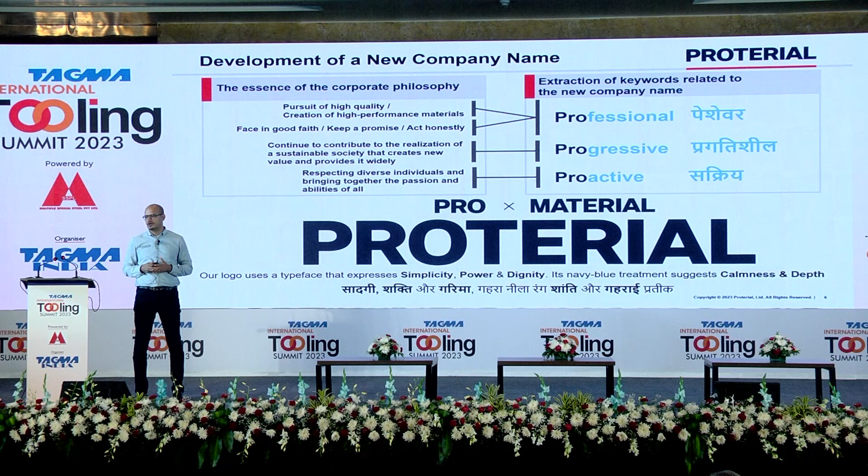You must be wondering what is the philosophy behind it. It's a combination of 'pro' and 'material'. Pro in the sense we would like to convey ourselves as being professional, progressive and proactive, and of course we remain a material-centric organization - so Proterial. So Peshevar, Pragatisheel, or Sakriye - these are the foundations of the name or the logo in that sense.

But no matter what the change of name or top management, we still remain a Japanese organization. The production facilities remain as they've always been, in a place called Yasugi in the southeast part of Japan. It's a single manufacturing facility for Proterial products, and that hasn't changed in the last 150 years, I would say. The facility remains in Yasugi, where various specialty steels as well as die steel material are still manufactured.

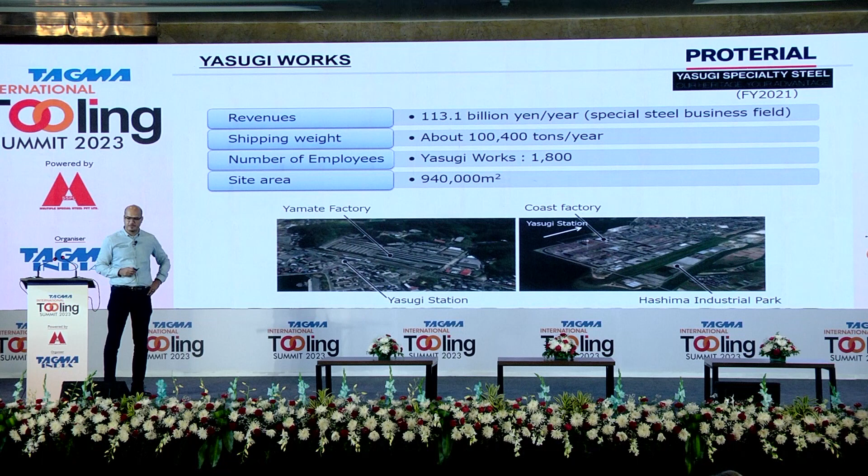Our heritage is basically related to the Tatara steel manufacturing process. This is something very unique to Japan. The Proterial Yasugi facility is one of the UNESCO sites where this traditional process of producing steel is still being followed, used primarily to make traditional samurai swords. That's where the origin is, that's where the organization started, and now it has moved over to various other segments as well, including die steel.

But the foundations are very traditional - we still produce such swords, the raw material for these swords. It's the only certified facility in Japan which can produce this raw material.

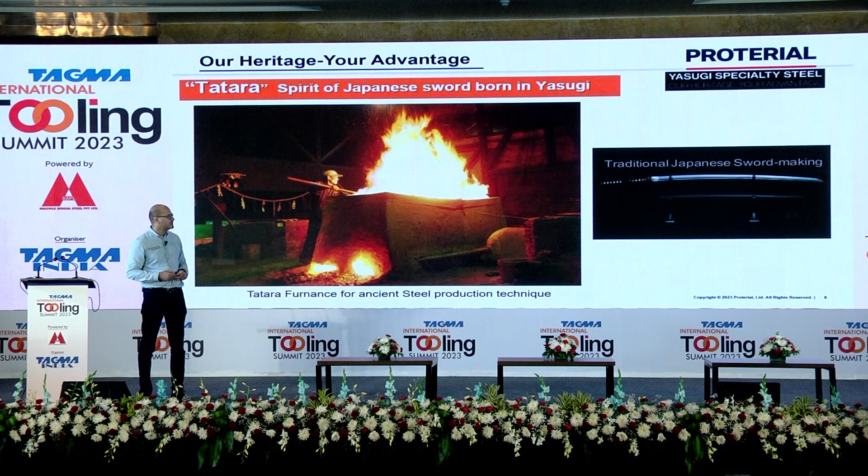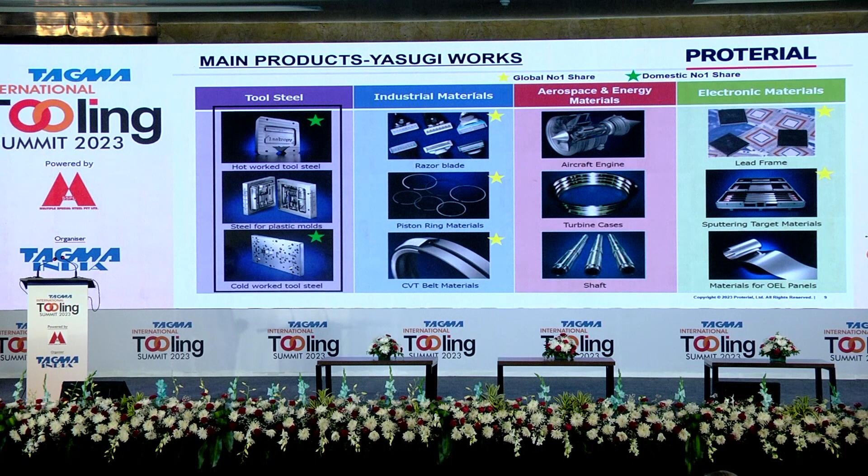As I said, the organization has diversified into various segments - die steel is just one of them. As you will realize, we put some yellow stars and some green stars in our product portfolio. Yellow stars are the product areas where we are globally number 1.

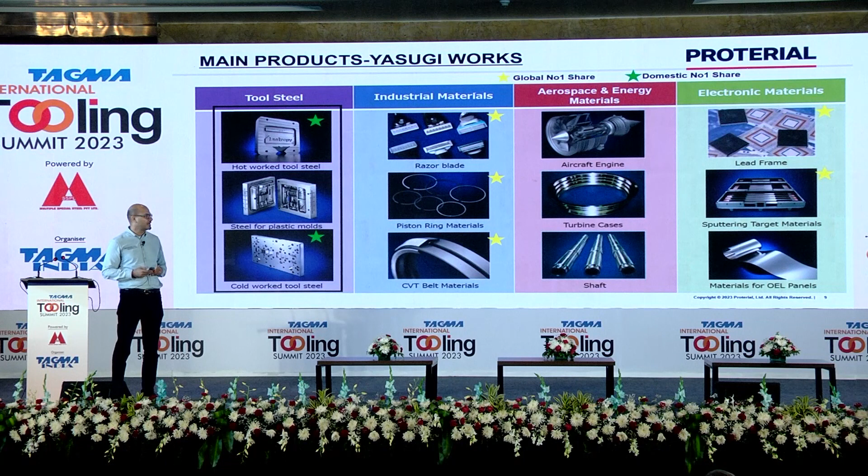Proterial, or Hitachi Metals as it was known formerly, is into various segments. Tool steel is one of them, but we are also in other segments as well: razor blade, piston ring material, CVT belts, sputtering targets for electronic material. But we take pride in the fact that we are number 1 in the Japanese market for die steel products - both for hot work and cold work steel. Proterial, or Hitachi Metals - I still can't take that word out of my vocabulary - remains number 1 in the Japanese market for die steel solutions. And that in itself is a big sense of achievement for us. We are not globally the number 1 supplier, but in the Japanese market we still hold the number 1 ranking.

In India, Proterial India, which I'm representing today, is based in Gurgaon, in Manesar. We have the complete portfolio of products for specialty steels, including die steel solutions as well. The operations are in Gurgaon, and we have a manufacturing facility as well for casting products.

The die steel retail operations, or the warehouse, just started in 2017, and that's where this whole journey of retail sales and coming into direct contact with our users in India began. We have the warehouse facility in Manesar where we cater to all customers directly. Having said that, we also have a channel partner in India - Goel Steel remains our channel partner. So in India, it's a combined approach where we try to cover the entire market both through direct operations as well as through our channel partner.

They also have the heat treatment facility today in Chennai, but we are investigating the possibility of investing in our own heat treatment facility in Manesar as well. So we want to be seen as a solution-driven organization rather than just product suppliers.

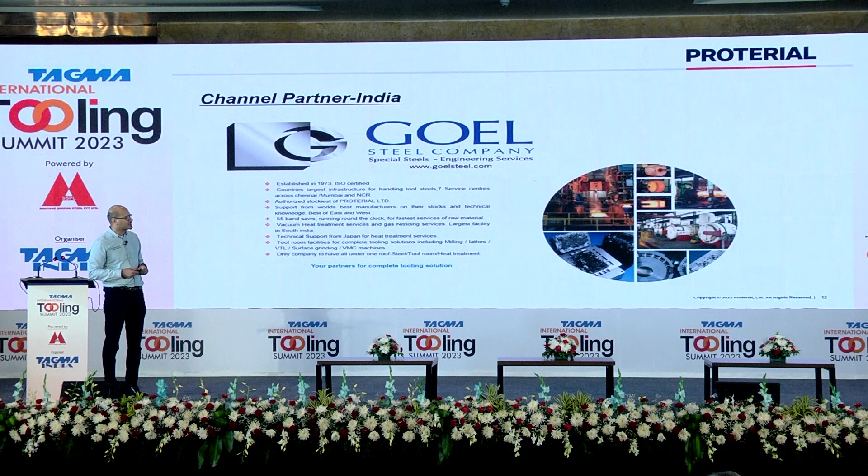Isotropy is something very unique to Proterial. Isotropy means that when we produce steel, we ensure the physical properties of steel are uniform in both the longitudinal and the transverse direction.

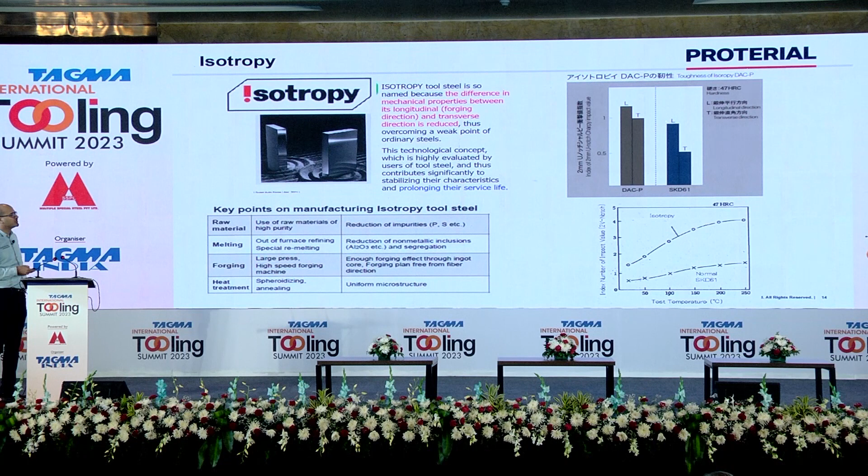A very simple example, this is SKD61. Always the toughness in the longitudinal direction would be much better than in the transverse direction. This is one gap we try to cover with our grades, where we not only improve upon the toughness, but also reduce the quantum difference between the physical properties in both directions. With that, you can be assured that irrespective of the orientation of your die or how you are using the raw material, you still get the same consistency of physical properties for your operations.

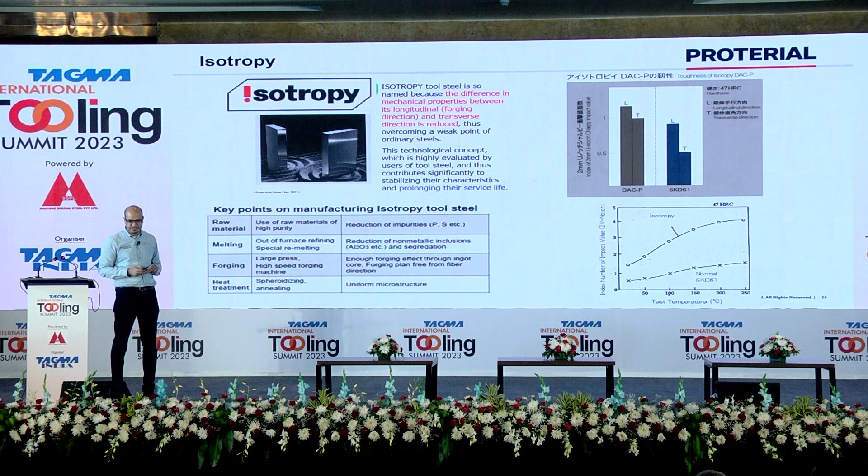I would not go into the manufacturing process, this is something which is clear to everyone, but we must highlight that our processes are very consistent. What we really believe in is the vacuum arc remelting and the ESR process, so that impurities are removed from the steels and you get the best quality steel available in the market today.

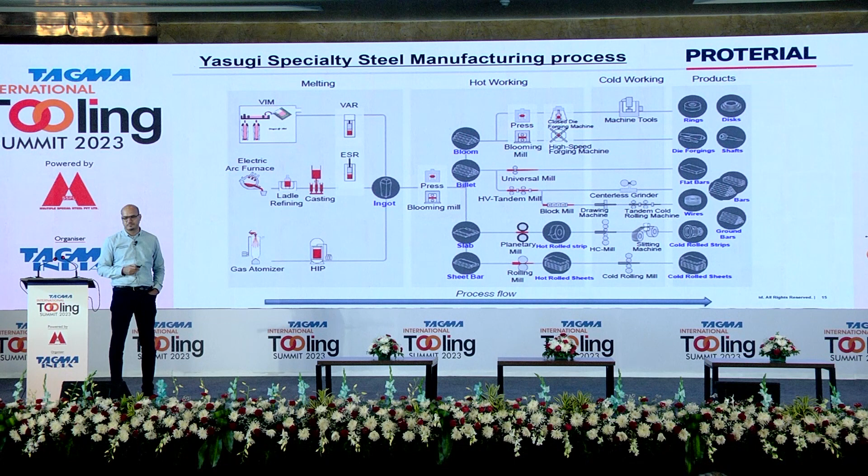I'll spend the next few minutes on the main topic, and that is some very revolutionary products that have come for the industry in both the die casting as well as the cold work operations.

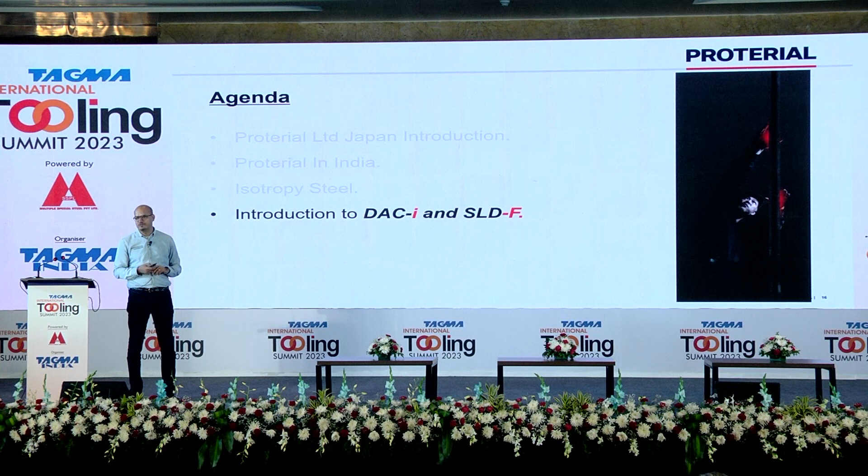Proterial, or Hitachi, does not introduce new products that frequently, but incidentally, in the last 2 years, the R&D department has been working for a number of years, and now it has come up with these two solutions which we feel have the capability to revolutionize the segment.

This has been made possible basically because we've invested in some very high-end equipment in our plant. This is one of the only facilities that exists in the Asian region, at least. A 100 meganewtons machine, a forging press designed to deliver a forging force of 90 meganewtons, and forging force and upsetting force of 108.

With this, even the possibility to do the ESR sometimes gets eliminated because the steel you get is very compacted. The kind of grain structures you get is extremely nice in that sense. With that facility, we are able to produce some of the new grades which I'll talk about today.

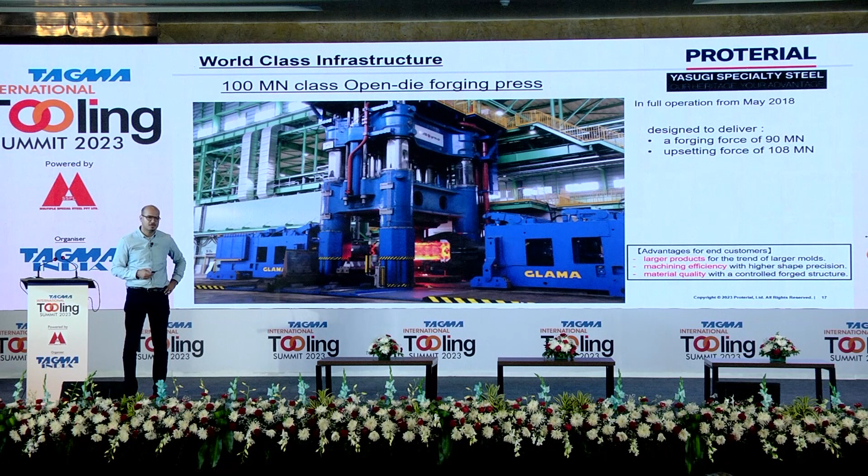The first one is the DAC-I grade. Indian market is already familiar with two of our major grades, that is the DAC-P and the DAC Magic series. DAC-P is the SKD61, the normal range. DAC Magic is the double ESR or double refined grade, having extra toughness and extra resistance to cracks. But there was always a gap in between, which we have now tried to cover with the DAC-I.

With this, we feel the positioning is now extremely strong. We're not only able to cater to the toughness demands in the die casting operations, but also able to maintain high hot hardness without compromising on the toughness part with this DAC-I solution.

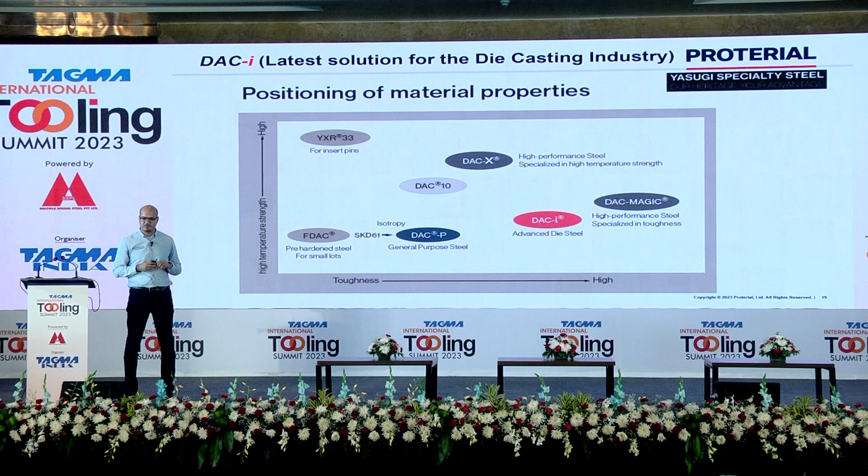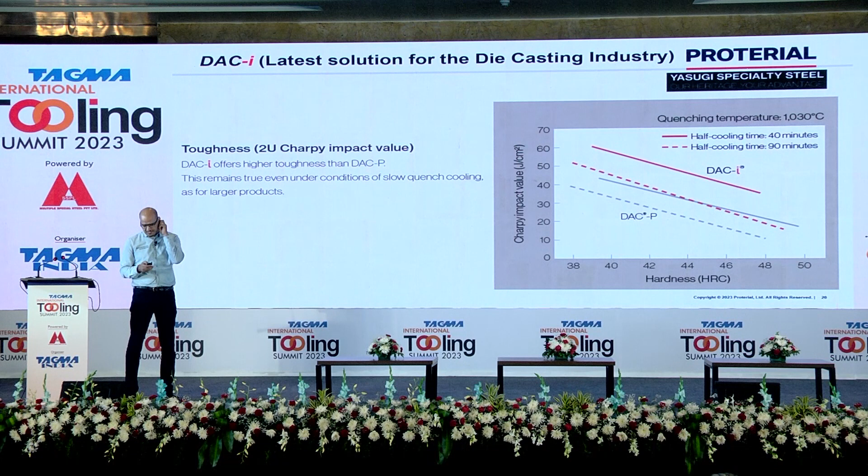The toughness or the Charpy impact value is much better compared to DAC-P. This has been proven both for a half cooling time of 40 minutes and 90 minutes. By this, we mean that no matter how big your die or tool is, this is still able to deliver very good results when it comes to the Charpy impact value.

Similar results in high hot strength compared to DAC-P, it has shown much better results. We are now promoting this grade as much as possible in the Indian market, and it has got very good reviews as well as results so far.

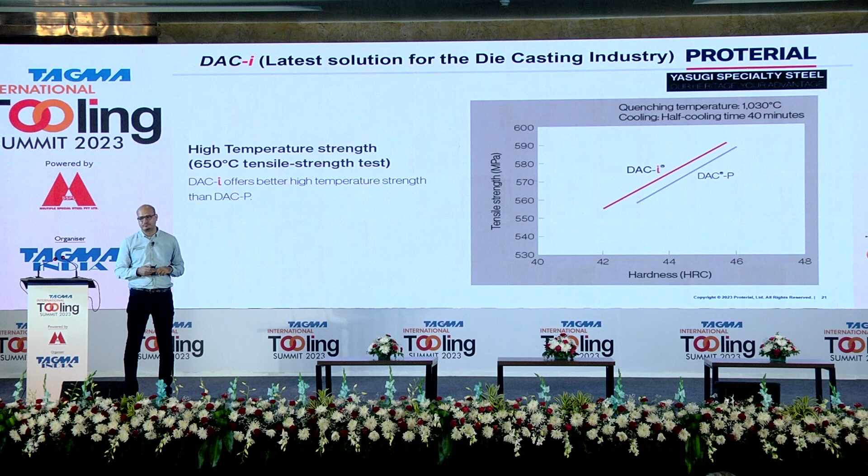But our biggest testimony is the largest EV manufacturer in the world, for which they have already, they are trying to establish this grade at this customer.

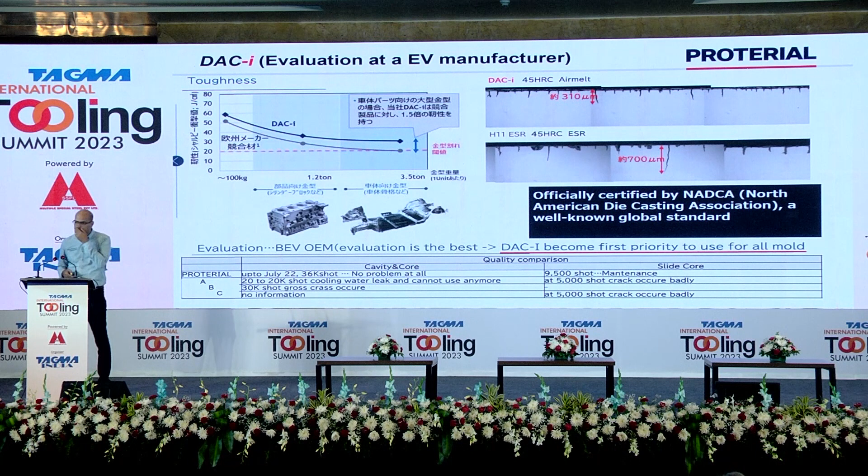You can see there have been several trials made with different materials, and DAC-I was the only grade which stood the test of time at this particular customer with much better results compared to any other grade.

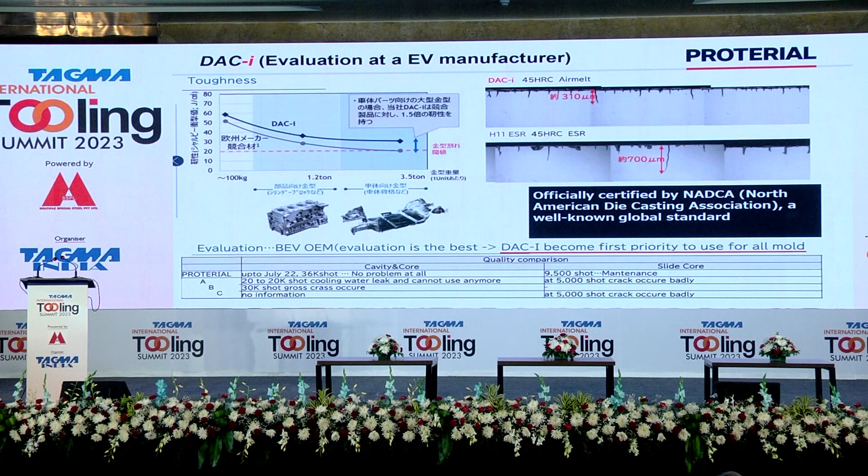And this is officially now on board for the largest EV manufacturer in the world, and DAC-I is an approved grade for that application. And with this, we are now into some big size molds for the die casting industry.

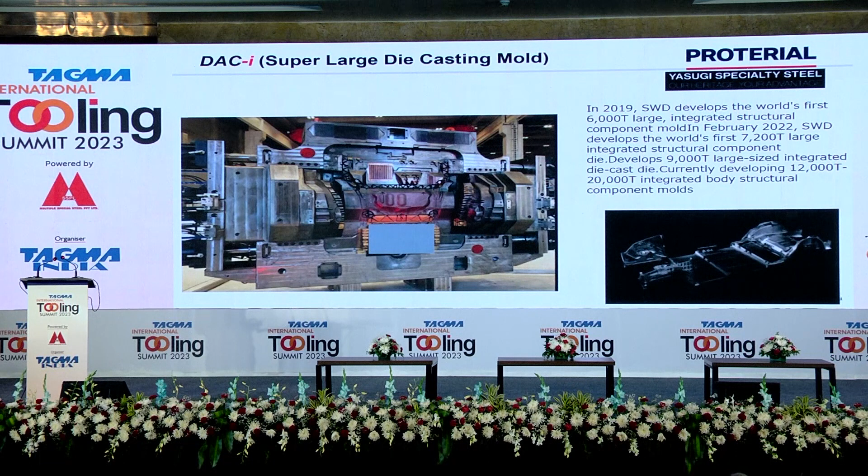9,000 ton capacity molds, you will see it - so far it is only in China, but I am hopeful and very confident that this type of tools get imported into India as well, and someone out of you is able to produce such big tools for the die casting industry. That's where we feel the real power of our grades can be utilized.

So this is a brief summary of the die casting solutions.

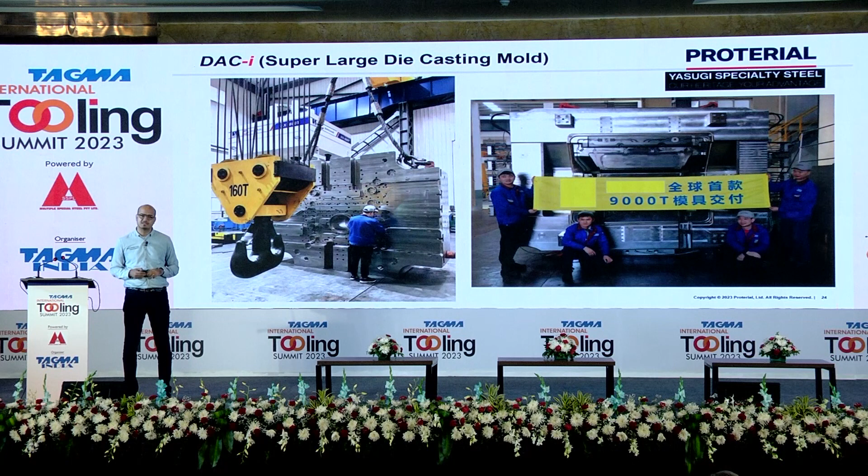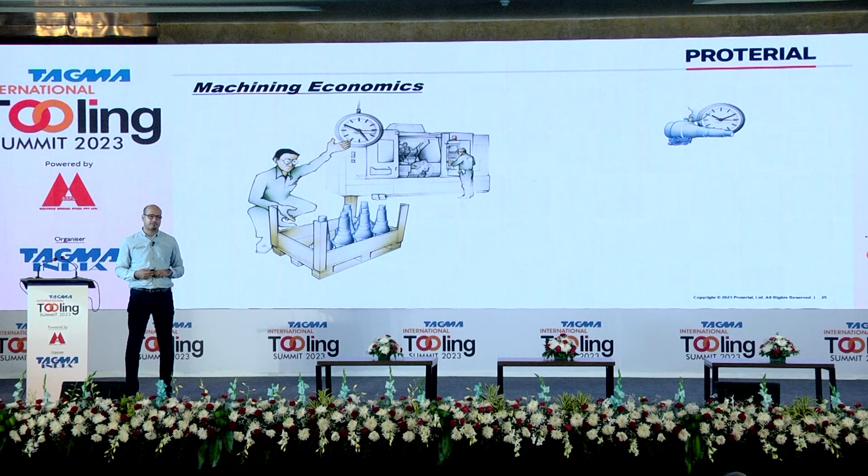Before we go into the cold work applications, I would just like to mention something very interesting, and that is the manufacturing economics. You are all into production, you are all producing parts, so you know the manufacturing economy probably better than us. But we feel that the cost is divided into two categories, the variable and the fixed cost.

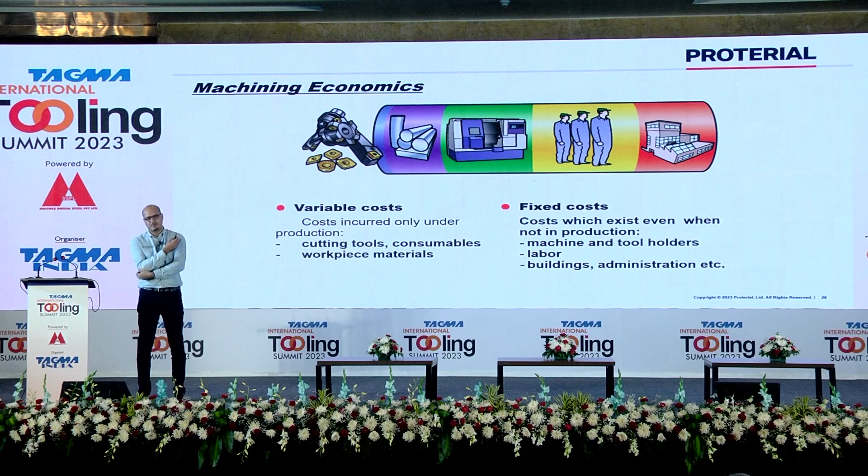Manufacturing economics is all about controlling these costs so as to produce the component at the lowest possible cost. What we've observed, which is also a common industry practice, is that you have several opportunities to reduce costing. If we consider decreasing the cost of the cutting tool, a 30% reduction in the price of the cutting tool would eventually reduce the total cost per component by only 1%. So that's not the right area to focus on.

The cutting tool is not the area you should focus on. What about cutting tools that give increased tool life? No. Even if you increase tool life by 50%, you're only reducing the cost per component by 1%. So what should one focus on? I think this area has already been covered in the previous sessions as well.

If we can somehow increase the cutting data or improve the cycle times, a 20% increase in productivity leads to a 15% reduction in the cost per component. And that's because now the same tools, the same raw material is being utilized, which reduces the fixed costs as well.

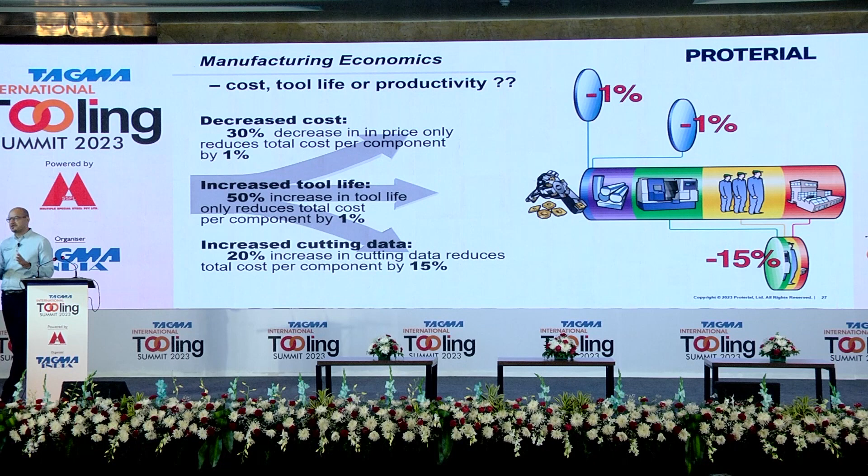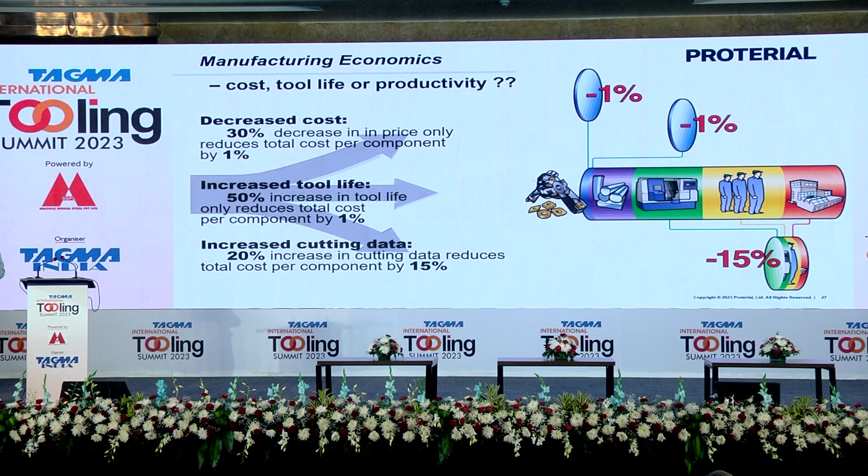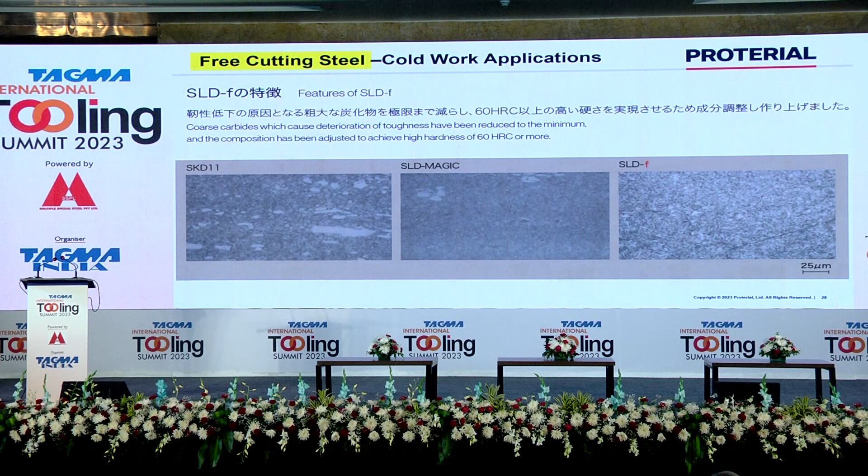With this background, for the cold work segment, we tried to come up with a tool steel solution which is much easier to machine compared to the options available in the market today. We call it the free cutting steel, or the SLD-f series, for cold work applications. SKD11 is a known solution already.

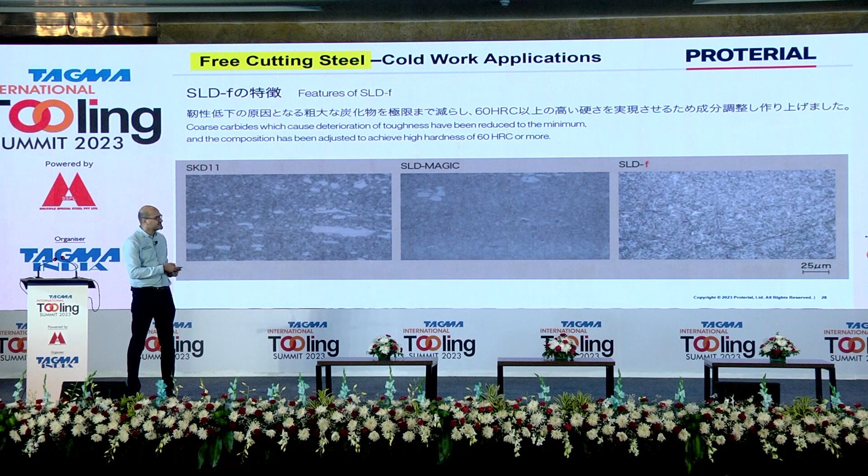SLD Magic is a patented grade by Proterial, which is a double refined grade. But SLD-f is a new grade which we call a free cutting steel, so you can machine this material at much higher or faster rates compared to your existing solutions, and reduce your cycle times tremendously without compromising on performance. This has been made possible by improvements in the grain structure and the chemical composition as well.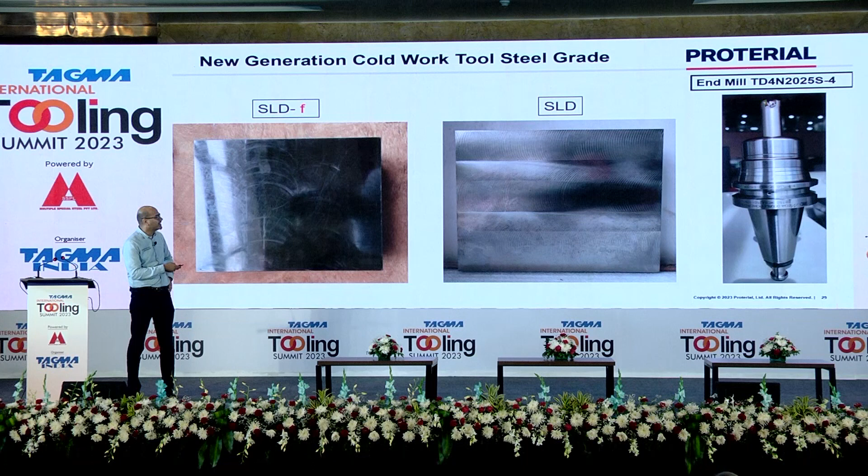Some quick examples. This is a test we just concluded at a technology center in Pune last month, where we compared machining of SKD11, our SLD grade, compared to SLDF. I think this was a high feed end mill, where we wanted to compare the results.

In the previous session, the gentleman talked about increasing the parameters to improve the tool life and productivity, and it all boils down to the metal removal rate. 83 was the existing benchmark with SKD11 at various parameters. By just improving the depth of cut as well as the step over, we were able to go up to 133 - that's a 70% improvement in productivity.

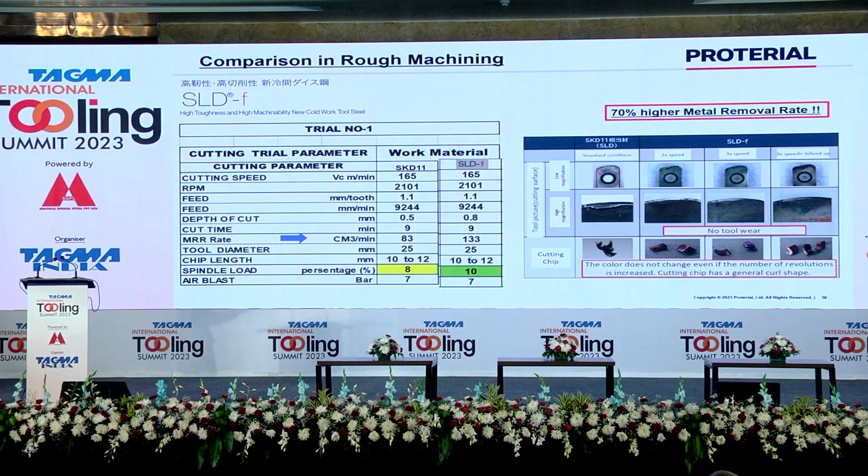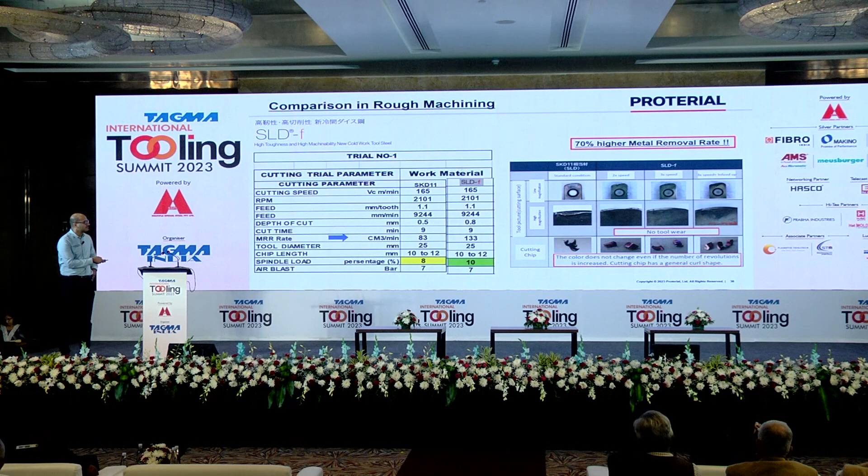So imagine reducing your cycle time by 70% just by utilizing a raw material which is much easier to machine compared to existing ones, without compromising on tool life whatsoever. In fact, you can see the existing tool wear on the standardized inserts for SKD11 - SLDF has a much better machining wear pattern compared to that.

So this is machining at 133 cubic centimeters per minute, a 70% improvement over the existing cycles for cold work applications, which we feel is going to revolutionize the way you machine your dies and tools in the future for cold work applications.

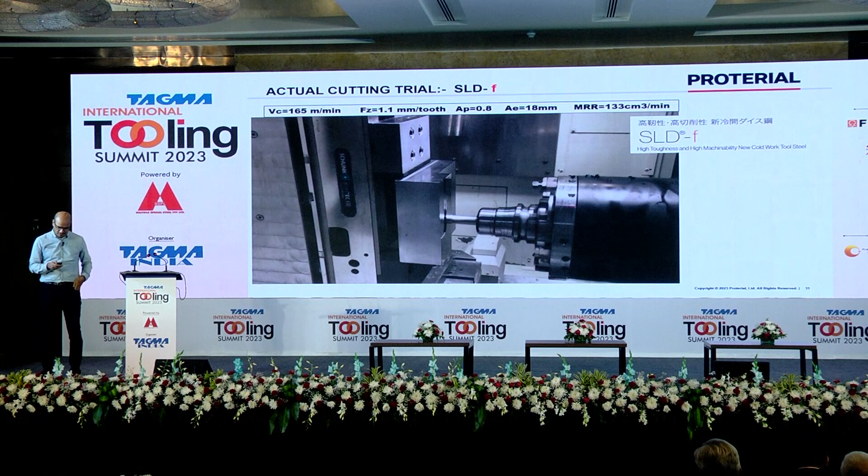We tried to do some analysis on the chip formation as well. The results have been very encouraging. SLDF has given very good, consistent results in terms of chip evacuation and integrity of the tools.

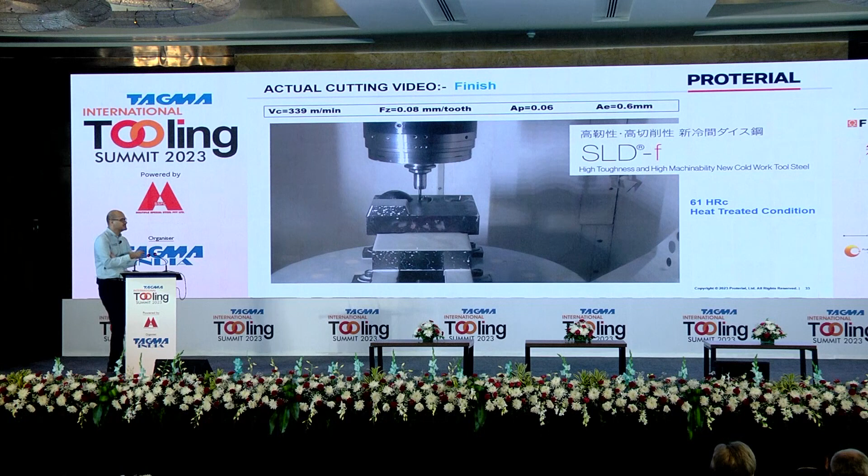This is done on a Makino machine with some Mitsubishi tools, but the results with SLDF have been phenomenal. We can easily say 70% much easier to machine compared to the existing ones. And this is not only in the tempered condition, but also in the heat-treated condition - 61 HRC - we tried to replicate the results to find out whether we could enhance productivity.

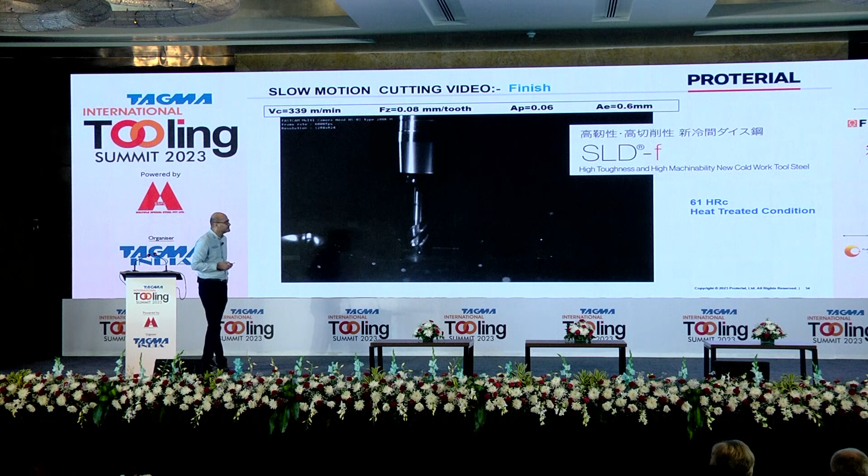Yes, the results are similar. This is a cutting speed of 340 meters per minute on hardened steel of 61 HRC in a heat-treated condition. The chip evacuation as well as the life of the tool is extremely good, and we believe this will change the way tools are getting machined today.

This has a tremendous opportunity to reduce your cycle time and bring it to a level which was not possible before. And this has basically been made possible - you can see the chip formation in conventional SKD11 steel versus SLDF. The shearing is much better compared to the conventional steels.

With this change of microstructure as well as the overall chemistry, we have been able to make a free cutting steel available in the market today. So these grades, these stocks, both for DAC-I, which is a solution for die casting, as well as SLDF, are available in India today. We have the solutions. Japan is already using these products, and we are glad that we are now able to promote it to your applications as well.